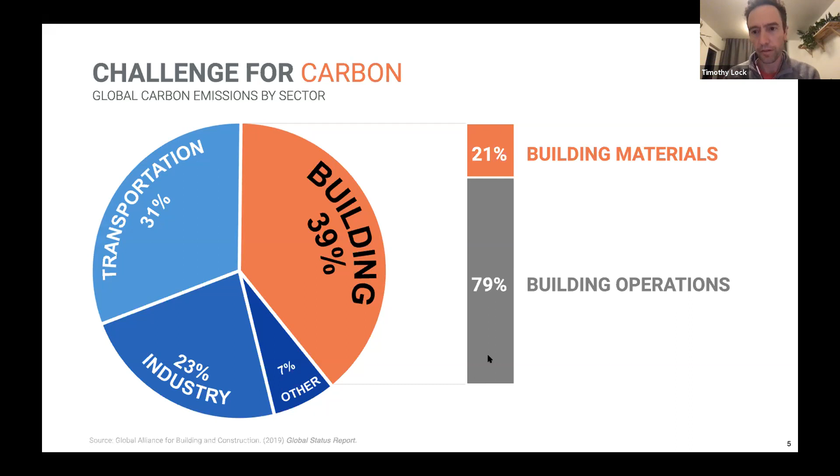So the energy we use in keeping buildings running over the course of their lifespan—and they last a long time, right? 50 to 100 years—these things are standing up and using energy, using materials and requiring maintenance. So if you look at that, and then you look at the amount of new construction being created every year...

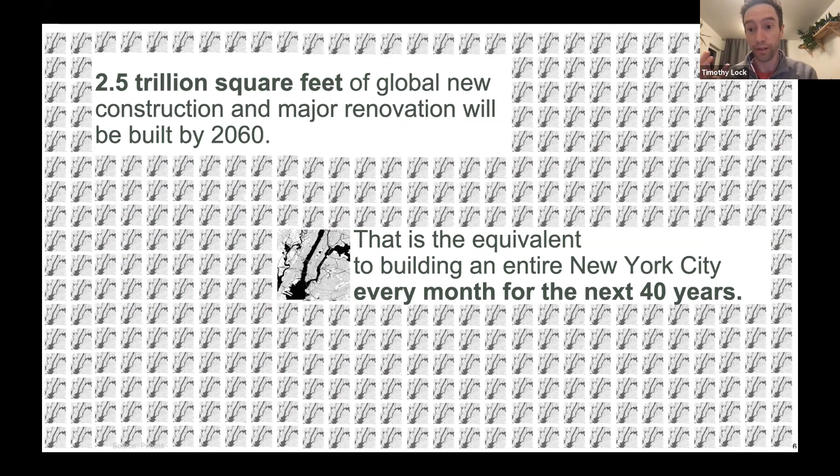We look out to 2060, so 40 years into the future, and 2.5 trillion square feet of new construction will be built. That's the equivalent of building New York every month for the next 40 years. Well, we better make some really good decisions about the buildings we build if that's the trajectory we're on. So for us, we asked ourselves a simple question: what if buildings improve the world?

Let's imagine that hypothetical, instead of the gut reaction that they're automatically going to be a draw on the environment. So in choosing how we related to existing building certifications or green building metrics, we immediately gravitated towards Passive House.

I have these 4 sections here. There's Passive House—these are the main building certification criteria currently used in the US. There's LEED, which is the oldest of the 4 and probably the most well-known. There's the Well Building Standard, a European-based standard starting to be adopted here. And then there's Living Building Challenge.

We saw immediately that our general mission and approach to practice aligned specifically to Passive House. That represents the single biggest reduction out of all 4 in the amount of operational carbon used by buildings. So to us, if we're going to make the biggest possible swing we can at this problem, it was obvious that we had to choose Passive House.

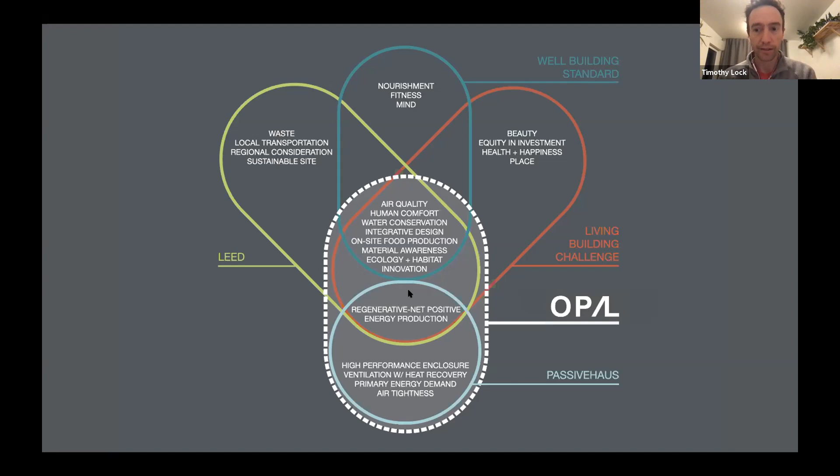So we made the audacious statement that we're going to bring Passive House to every project, whether the client wants to certify a building or not. And luckily, Waring wants to certify a building, which is great—we always like that alignment. But we felt like it was our ethical imperative as architects, with this big of a responsibility, to do that.

So what is Passive House? Essentially, it's taking a standard construction building and adding a lot of insulation to it, particularly in a northern climate like New England, to make sure that any heated air stays inside the building, and any cooled air stays inside the building.

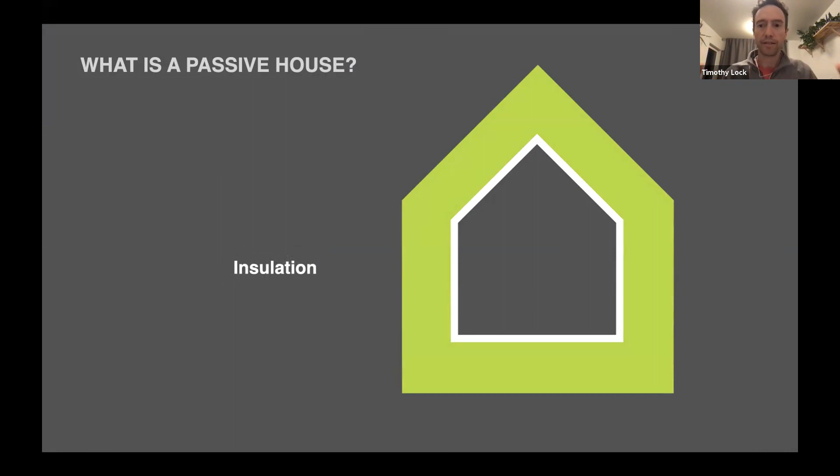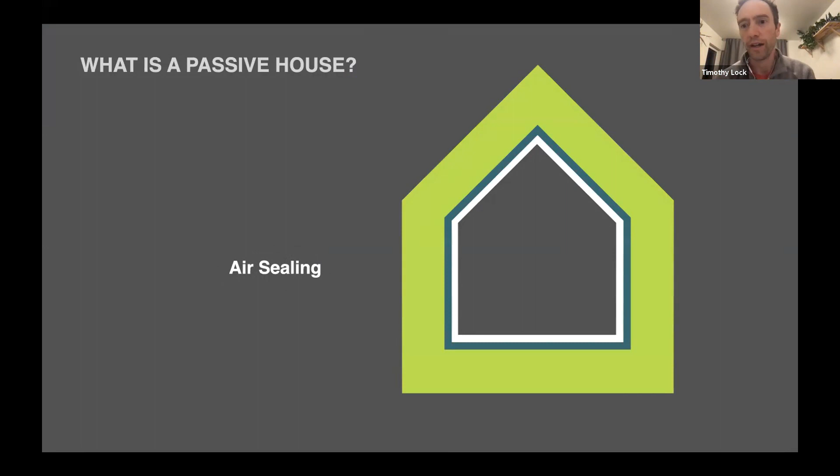Then we want to air seal it. We want to make sure that unconditioned air outside doesn't get in. A really simple concept, but a lot of us might live in drafty houses and know what it's like to not have that air sealing.

But once we do that air sealing, we need to add ventilation so we don't die, because we can't just breathe carbon dioxide as humans. So we want mechanical ventilation. We want to be able to make sure, even in the worst conditions when our windows are closed, that we're getting 100% fresh air from the outside, tempered by the outgoing air coming out of the building.

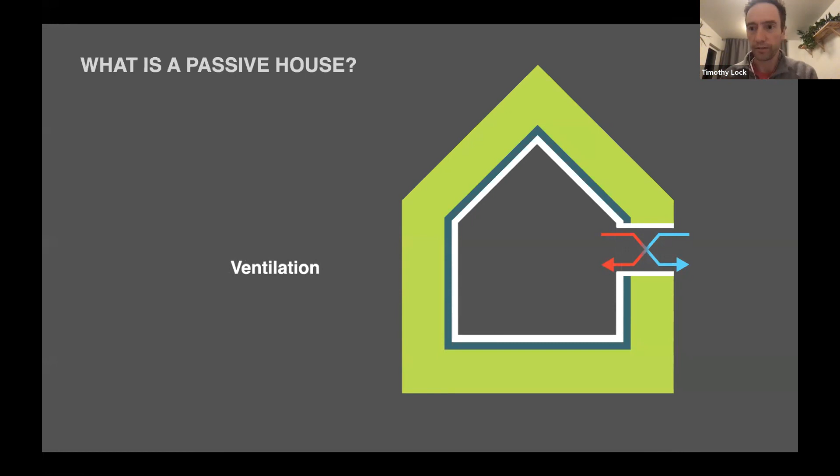This has been especially important during the last year. All of a sudden, everybody knows about ventilation rates, right? Well, Passive House has been doing 100% outside air since its inception in the mid-90s, and we do that in all of our buildings because we think it's appropriate to this building technology and typology.

Then we want to have triple glazed, climate specific windows. Both of those things together: triple glazed so that tempered air doesn't get out of the building, and climate specific so we're letting in as much of the sun's energy as we can, and rejecting energy if it's in a climate where we don't need that sun energy.

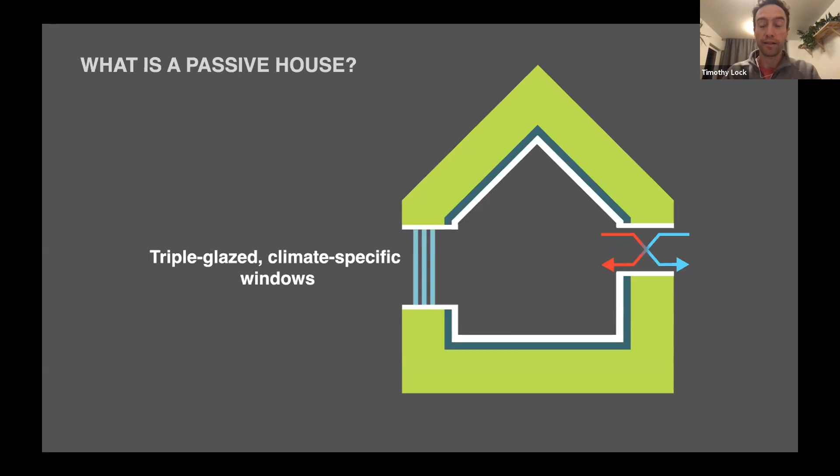Passive House is built around this idea that we should use as much of the heat that's passively generated as possible. That can be body heat from us inside the building, that can be sun heat from the sun. It can even be heat generated by the computers, the refrigerators, the dishwashers, the servers that we use inside our building. All of that's heat. And let's use that instead of the heat that's generated from fossil fuels, electricity, whatever.

What does that mean? It means an 80% reduction in energy use across all building types. That's the single most important goal of Passive House, is reducing that energy. And that's applicable to any building type, doesn't matter size, scale, or typology.

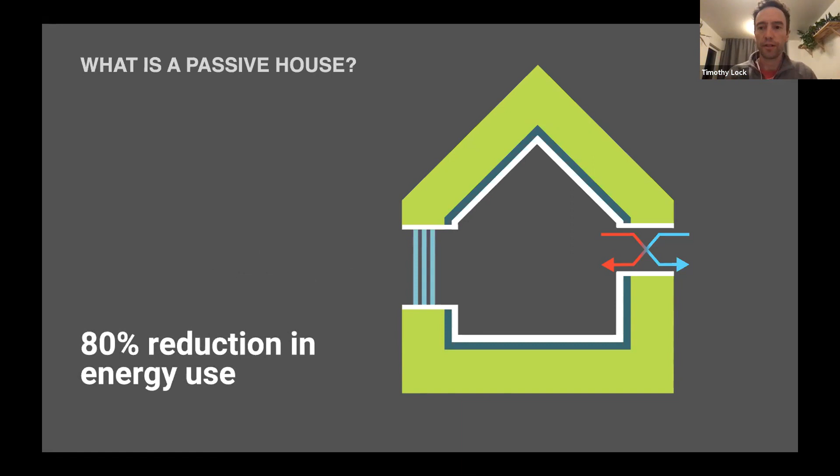And that's what's really interesting about Passive House versus other building standards, is that you really only have to hit these 3 criteria. You don't have to submit a bunch of materials to a LEED certifier. You don't have to be part of some much more subjective analysis that Living Building Challenge, for instance, has. It's really just about minimizing the amount of energy used for space heating, minimizing the amount of air that leaves the building through the walls.

So field verified air certificate, air sealing testing, something we've been doing ongoing at the Waring School. And then the total energy used by the building, so not just for heating, but all the computers, all the plugs, everything has to be below a certain number. We call that EUI, energy usage intensity, and it has to be below a threshold.

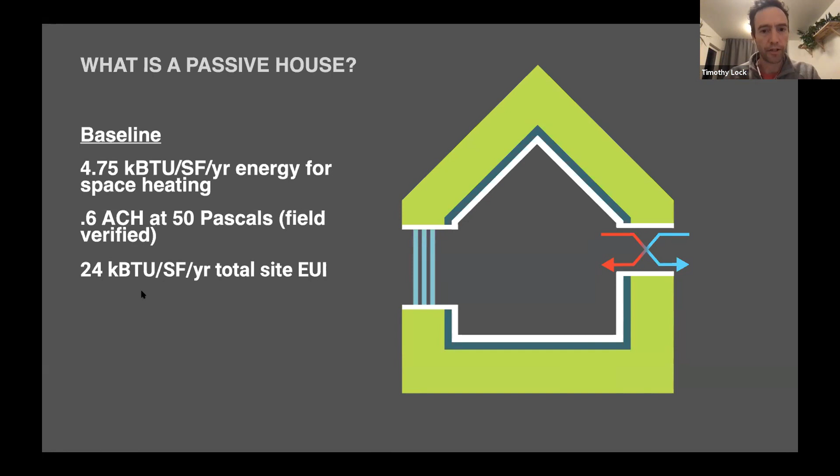And that's all based on square foot, so you can take this and apply it to any size building, no matter what. So it's a very simple, but very, very stringent metric that we go by for all of our projects, and that gets you to that 80% reduction.

And when we took this to Waring, we knew that this was a very key component. It was one of the 5 objectives for the project. But as we started to talk to the community and we did this kind of word cloud early on, it came up as a very important thing. But really, in any architectural project, there's all these other things you have to manage as well.

So when you get to scale, what I would call Waring a medium-sized academic building, we have some projects that are larger, but some that are definitely smaller, all around this metric. You just have to start balancing all these different desires with that ultimate Passive House objective.

And Waring wanted to be a certified building, not just designed to the standard, but actually get that certificate. If we get it, and we're on track to get it, we're in the clerical phase. We're just submitting photos, making sure we did it the way we said. It will be the first certified Passive House school in Massachusetts as of right now.

Hopefully nobody sneaks in under the gate before us, but Cindy and I checked today. As of today, we would still be the first one, which is great. So we're almost there.

And that really involves looking specifically at the floor plans and the layouts and everything that we worked with on an architectural level with the faculty, with the staff, with the students, and make sure that it also works in an energy model.

We have to energy model this building every phase of the project. And when it's working, when we know it's working, we see this type of chart here, where on the left is all of the heat loss in the building.

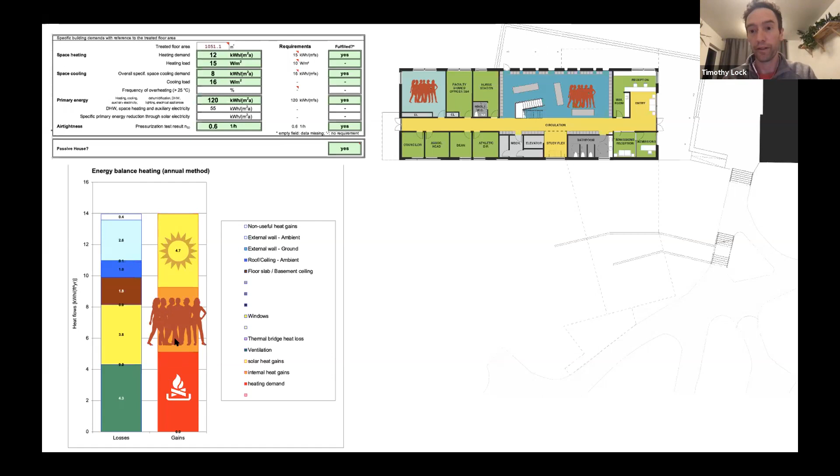When we know that's working, we see this breakdown that looks just like that. It can be a house, can be a school, doesn't matter. And it had to also, of course, meet the criteria for working with the site.

There was a very unique situation at Waring where there's an upper campus and a lower campus that were not connected by a building. They were connected by a long exterior stair that flooded all the time and poured water into the old school building. So we wanted this building to not only be Passive House, but an architectural form that allowed that landscape to be circulated through, and provide universal access from the lower campus to the upper campus. Adding on these formal challenges sometimes makes a passive house more difficult.

But one thing we've said from the beginning in the foundation of our firm is that we feel strongly that any building can be a passive house as long as you take the right approach and still meet the architectural needs.

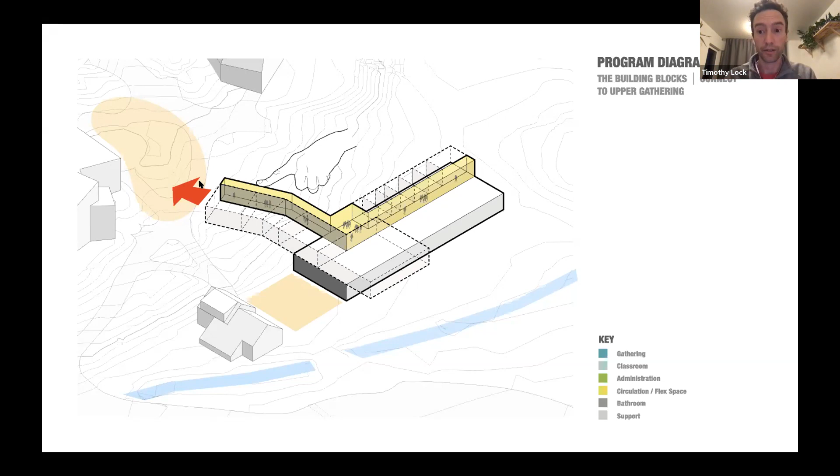Part of that was looking at that circulation on the upper floor and making sure we use that as a heat generation device. There wasn't optimal exposure to south in this project, and there was also a lot of trees, a lot of existing landscape that wanted to be retained. But by using this L-shaped form on the second floor, we were able to create this armature to space heat the interior of the upstairs through the circulation space by facing that angle to the south. Again, that offset between the sun's energy and the amount of heat loss through the windows becomes evened out and zeroed out, and that's the key with those climate-specific windows.

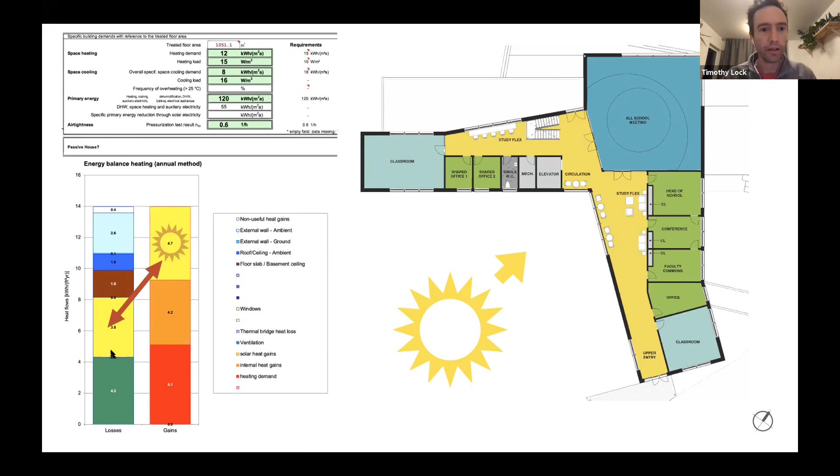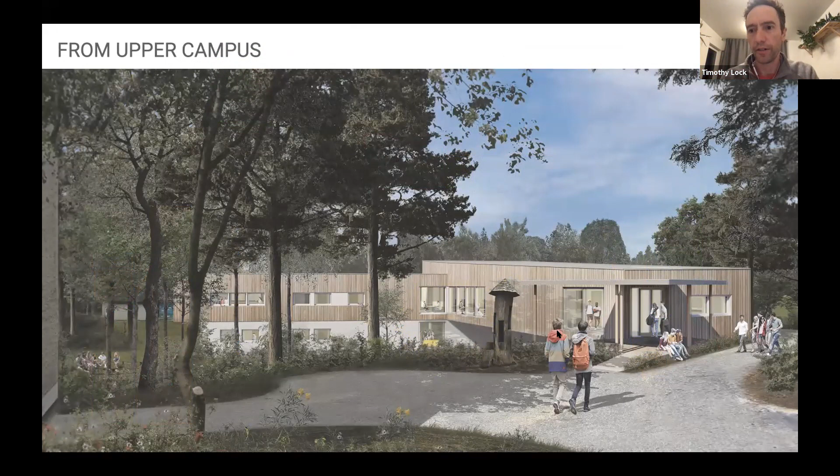Nat can talk about how annoyed he is about getting these windows from Germany, but sometimes we need to find the right glass for the right place and make sure it works so that throughout the lifespan of this building, we know we can count on that energy return. Here's a view of that upstairs that wraps to the south and has this long run of windows that allows the interior circulation space to be heated.

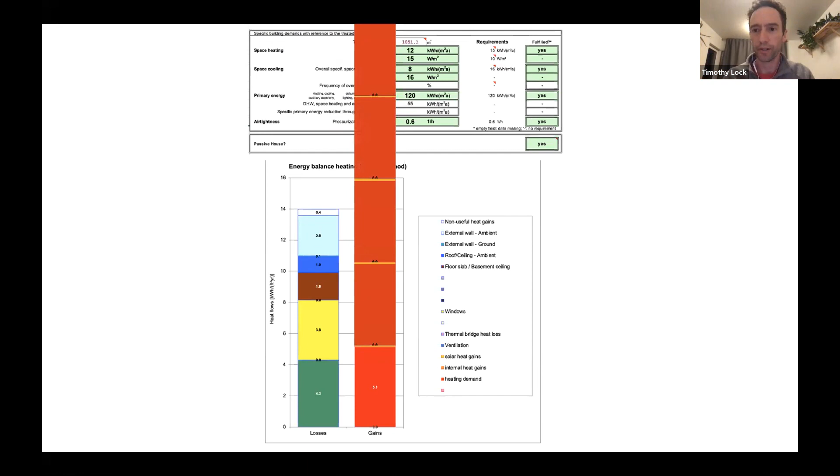So what does that mean if we were to take the same approach but do a conventional building? Same design, but it doesn't have the super thick insulation, doesn't have the good windows, doesn't have the air sealing. Well, it wouldn't just be double—this red square wouldn't just be double, it wouldn't be triple, it'd actually be off this graph. In a conventional building, which a lot of us on this call probably know well, you're essentially relying solely on your heating system, and it dwarfs the amount of heat generated by our bodies and the sun. We want to avoid that—that's the idea of conserving operational energy.

The end result, for us, is an incredibly successful project, we feel, and it's not quite open yet. We're just a few weeks away, but on track to be certified—we're in the final steps of that, so that's great. As we said, it's looking like the first passive house certified school in Massachusetts, unless somebody sneaks in ahead of us.

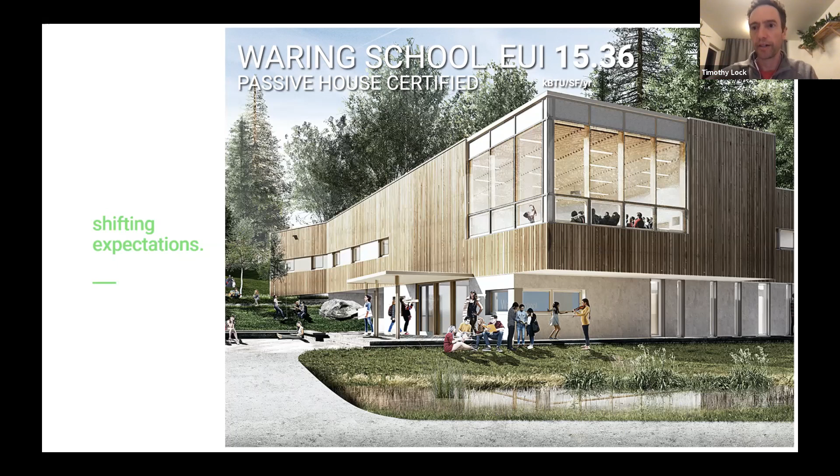And an EUI of 15.36—again, that's the total energy used per square foot on a yearly basis. To give you a frame of reference, a typical school building at the national average has an EUI of about 80. So we're talking about a huge reduction in the amount of energy used, and that's cumulative over the lifespan of the building. Every year that delta gets greater and greater against a conventional building of the same type.

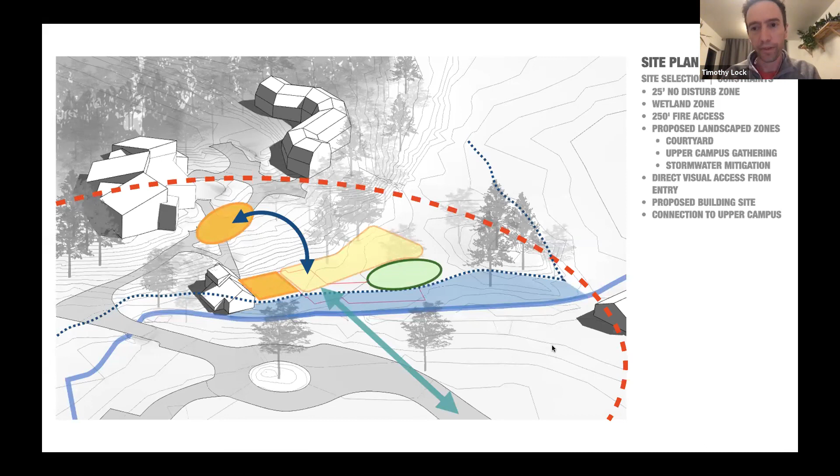That solution included a roof actually meant to retain water—a blue roof on the lower portion of the building, which is an exciting part of the project too.

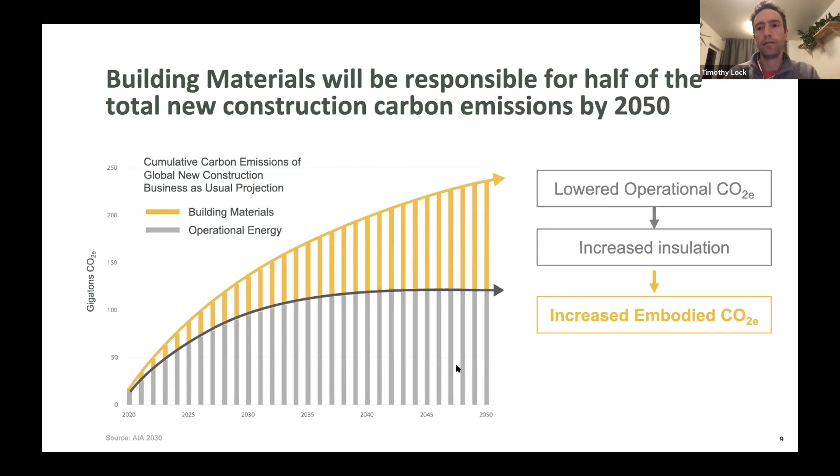Part of our expanding focus over the last three years is to start modeling all our buildings for total carbon—not just operational energy, but all the carbon used to construct the building. We do that through software in our drafting program. What we've learned is that it really puts more onus on material choices because of the increased mass, and they have to work together.

So we're looking at incorporating certain amounts of wood structure into all of our buildings. Waring is a hybrid structure, so there's some steel and some wood. The great thing about building in wood is that the tree soaks up carbon dioxide its whole life. If it dies and sits in the forest, it gives that carbon dioxide right back to the atmosphere as it rots, so it's essentially net zero. But if we harvest it sustainably from renewable forests and put it in a building where it can sit static for 50 or 100 years, we've trapped that carbon—it's not released back into the atmosphere.

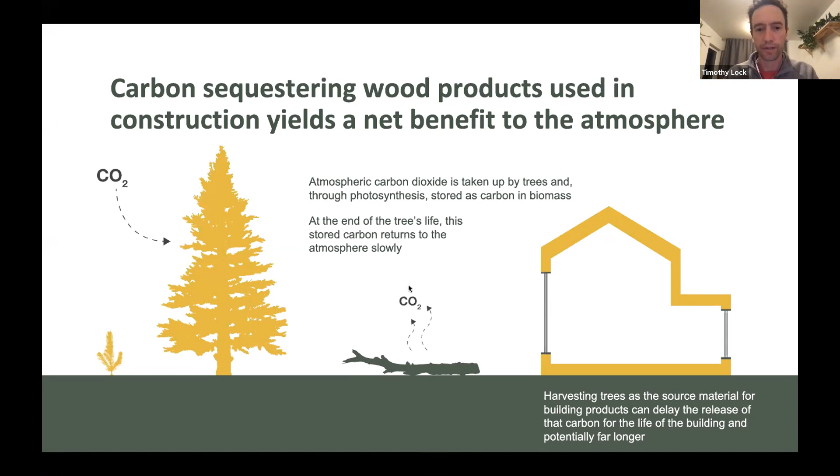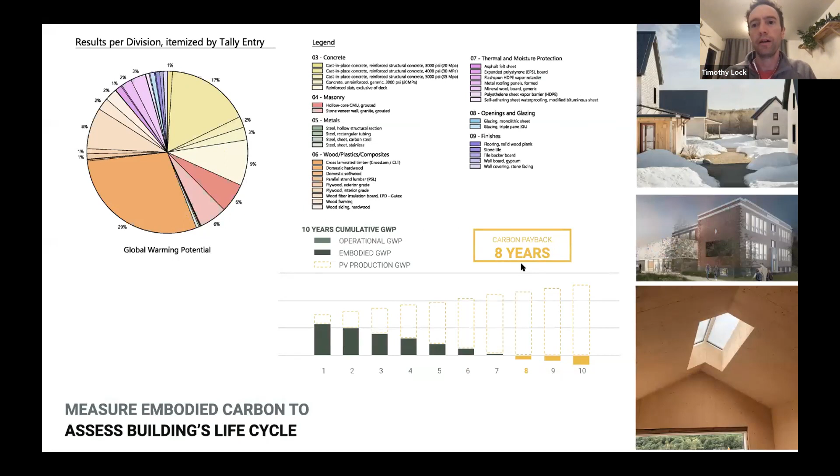That, combined with Passive House design, is really the ticket to truly carbon-positive buildings that actually reduce global warming potential in the atmosphere. That's the next step all of us have to take on this journey of sustainable buildings. We do that again through modeling software, and we've learned that combining these two approaches, we can get a full carbon payback in about 8 years by maximizing sequestration of carbon along with a Passive House approach.

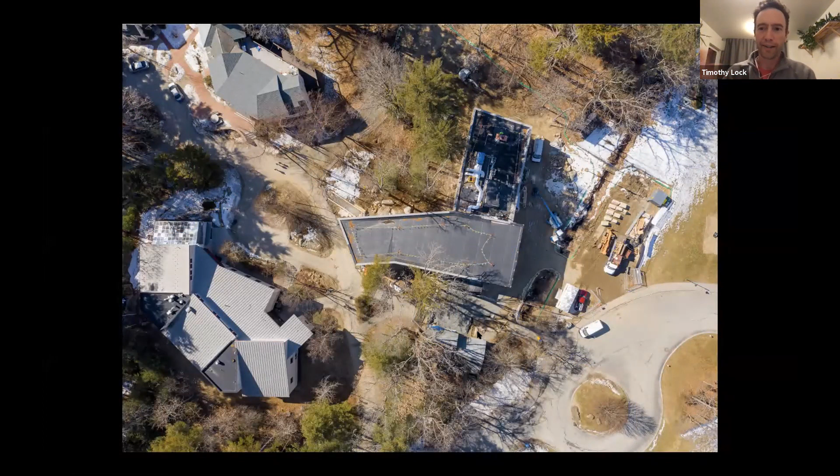Lastly, I'll finish up with some cool images taken on site yesterday by our excellent certified Passive House consultant and photographer, Michael Bailey, a staff member of mine. Just some drone shots of the building and some interiors—again, this is in process.

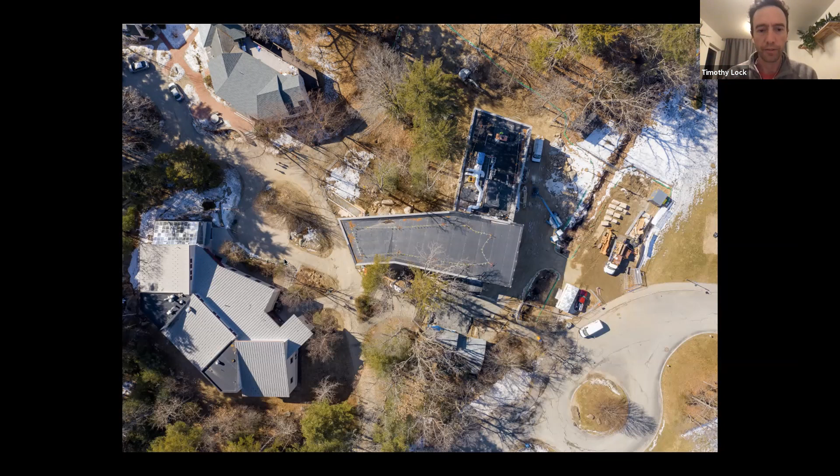This is from above. You can see the lower campus, the intermittent stream here, and the upper campus, with the building sitting within, and the upper volume twisting to connect to the upper campus, becoming that bridge over to the grade up top. This is from the front entry, a little higher up than the image Cindy showed earlier.

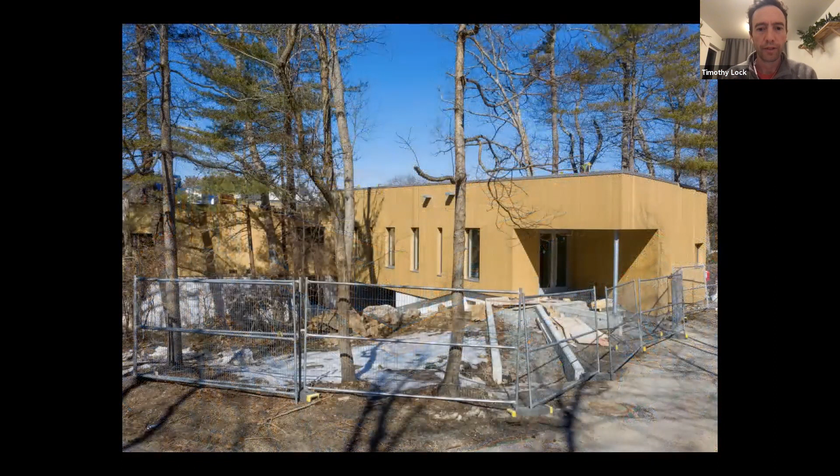This is from the upper campus, again, still a construction site, but the idea and desire from the school is that from the upper campus it should still look small and not like a giant building, even though it was this 2-story building. I think it's probably close to the biggest building on campus.

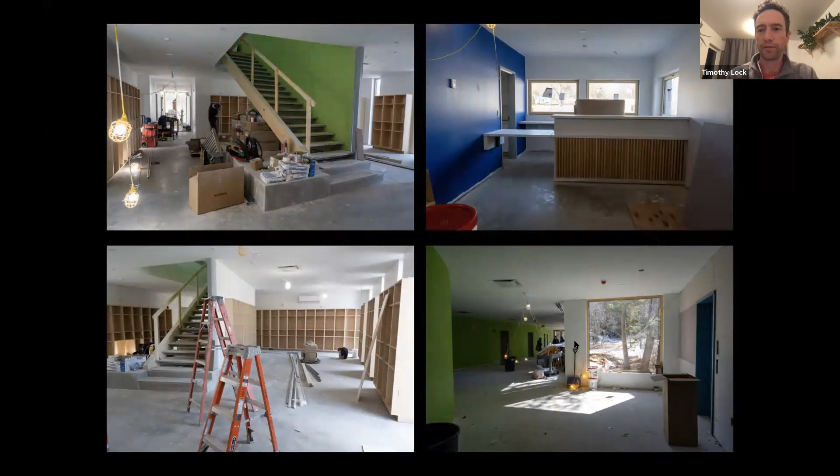But from the upper campus, it's a 1-story building with a small entry porch, which is nice and keeps it feeling smaller. Some quick interior shots. Again, these are rough because it's still under construction. The entry area, a couple shots of the Grand Salle with all the cubbies for the students, and the stair leading upstairs. The stair drops you off right in the upstairs corridor, and you can see the big windows at the end of the hallways here.

And I know Nat wants one in his mountain house at some point.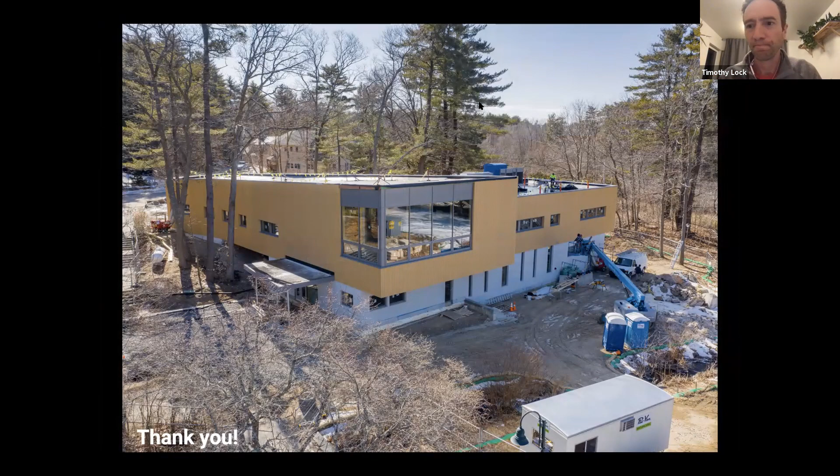All righty, thank you so much, Tim. So that kind of answered our question about why Tim Lock and Opal chose Passive House standards and what some of the features are of the Waring building.

The issue, of course, is that concrete is also a very, very high embodied carbon material. So that's kind of a crux point right now between Passive House and total carbon - how much concrete do you really want to use? And initially in the early Passive Houses in Europe, if you tour them - which we get to do when we go to the Passive House Institute conference, touring these Passive Houses that have been in operation for 20 years - they're all concrete.

They're concrete with a ton of insulation on the outside of the building. Concrete floors, concrete columns, everything. And there is a cheaper economy for concrete there, but we're also learning that there's a really, really high life cycle cost to using concrete. In fact, there are islands in the South Pacific that are disappearing solely because of sand extraction to make concrete. So that's definitely the next step in synergy between Passive House and embodied carbon to deal with.

Because if we can't use thermal mass in that way, then we have to be careful about our envelope even more to make sure it retains heat. But there is a concrete slab on the first floor of this building, and a little bit on the second floor. Largely, the structure of this building is steel and wood, which are not considered thermal mass sinks in the way Passive House assesses it.

So the question about the roof - one of the major impacts we had to mitigate through this process was the fact that the building is so close to an intermittent stream. So we had wetlands issues we had to deal with as well. There are basically strict drainage requirements that were part of the order of conditions from the Beverly Conservation Commission.

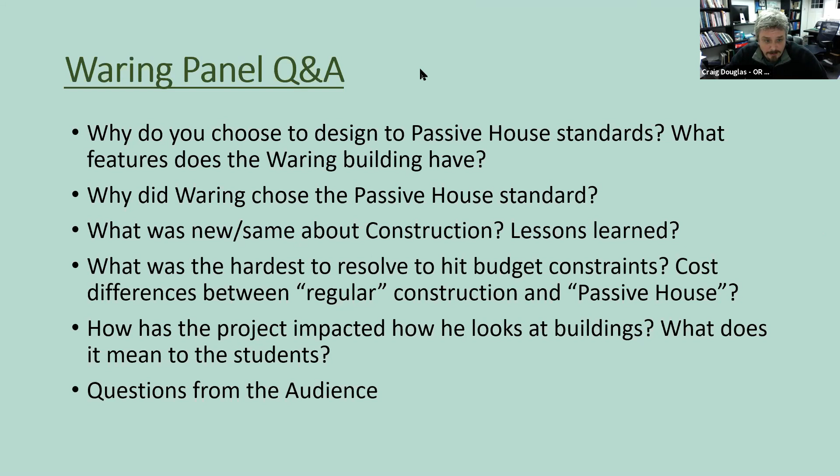We've mitigated that in a few different ways, but if we just limit it to the roof right now - the blue roof, which is the lower one, is also where you can see the HVAC equipment on the roof. The intention is that the water drains off the roof at a much slower rate than normal. The roof holds the water and controls the amount released into the site, so as not to overwhelm or flood the wetlands and drown out the plants.

There's other issues we have - we've used permeable pavers, which allows water to seep into the ground rather than just run straight off into the wetlands. So those are kind of the impacts that led us to a blue roof in this particular case.

Again, very complex site. The other piece in terms of the solar panels - the particular location of this building with all the trees on the south side essentially prohibits putting solar panels on the roof because they don't get enough sunlight. They're all in shade from the trees.

I know that, and Cindy, feel free to jump in here too, but we have discussed bringing in solar panels elsewhere on campus, as part of the larger green sustainability goals of Waring and doing projects moving forward.

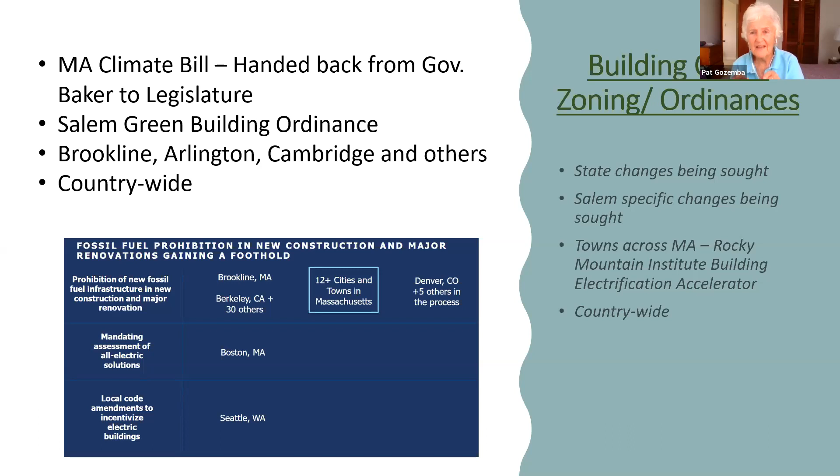As Pat mentioned, as part of the Rocky Mountain Institute Building Electrification Accelerator, we've gotten a chance over the past several months to talk with many communities - Brookline, Arlington, Cambridge, and others - that are moving forward with different citywide ordinances, zoning, or codes. This chart shows a couple of those, as well as 12 plus cities and towns here in Massachusetts, Denver, Colorado, and other cities around the country looking at prohibiting new fossil fuel infrastructure.

Boston is mandating an assessment of all-electric solutions so that new buildings are considered to be all-electric first and foremost. If they can't be, they have to prove why not. And Seattle has local codes to incentivize electric buildings as well.

One thing to note on the Waring building that we didn't mention: the previous building on the site that we replaced with this new one was heated with oil, and the oil tank was within the wetlands area of the stream beside it. So that's a huge environmental benefit in and of itself, that we got to remove that and take it out of the hazard zone. That's another thing to consider.

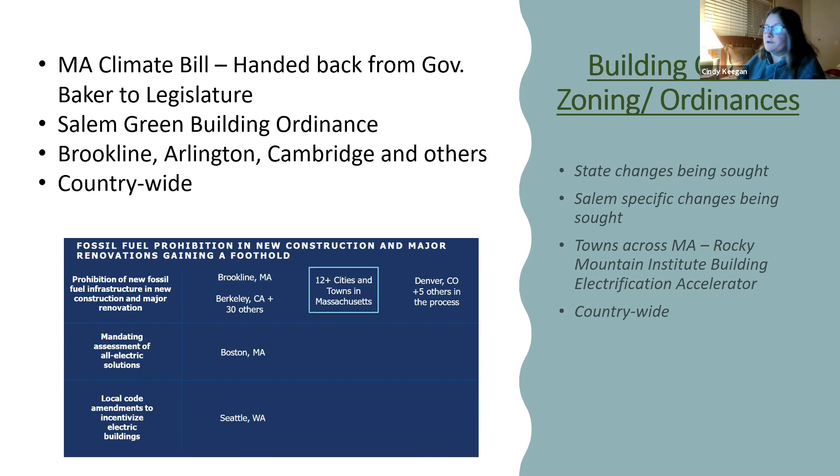And certainly with the new administration, there's a lot being moved forward on climate legislation, so we may see more from a building perspective there as well.